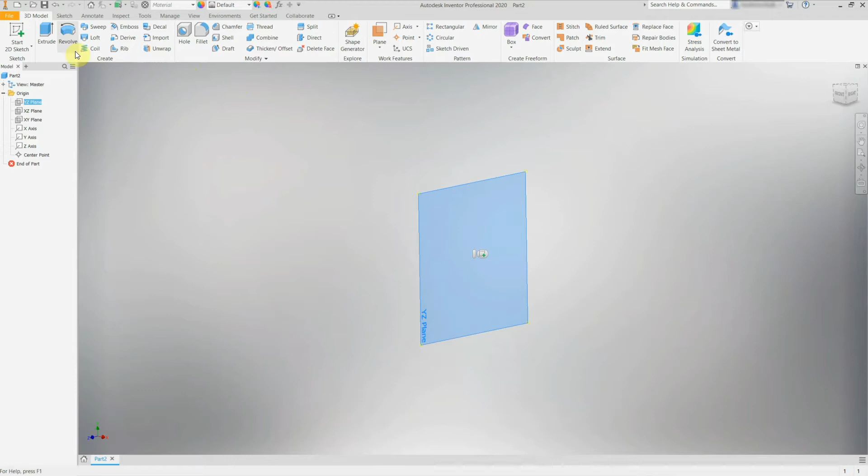We are going to model another component of the V block, specifically the shoe that goes across the V block to help grip the metal bars we put in place. It's a horseshoe shaped design, and we're going to start by drawing it from the end elevation standpoint. I'm going to create a new sketch.

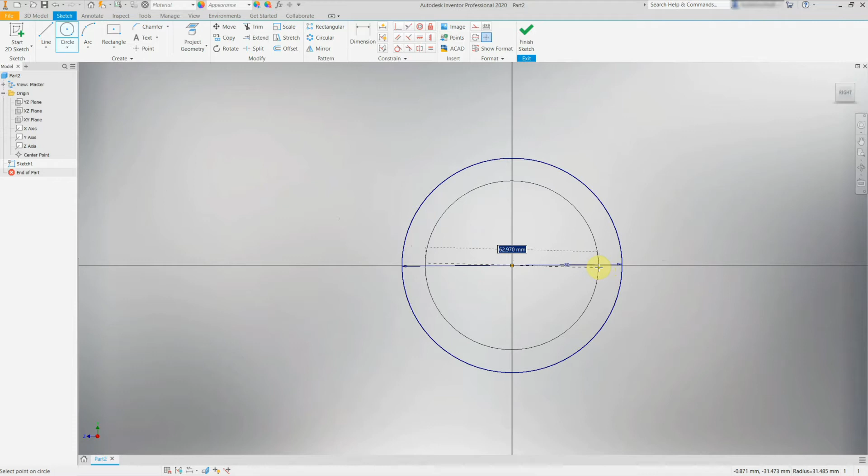The shape is horseshoe shaped in nature, so it requires two circles. I'm going to start with one circle, and the drawing says it's got an outside radius of 40 millimeters, meaning we need an 80 millimeter diameter circle. The inside radius is 30 millimeters, meaning a 60 millimeter diameter circle.

I'm going to take a straight line tool, turn it for construction, and draw this through the center, then use the trim tool to trim away half the circle, so we're left with a semicircle arch shape.

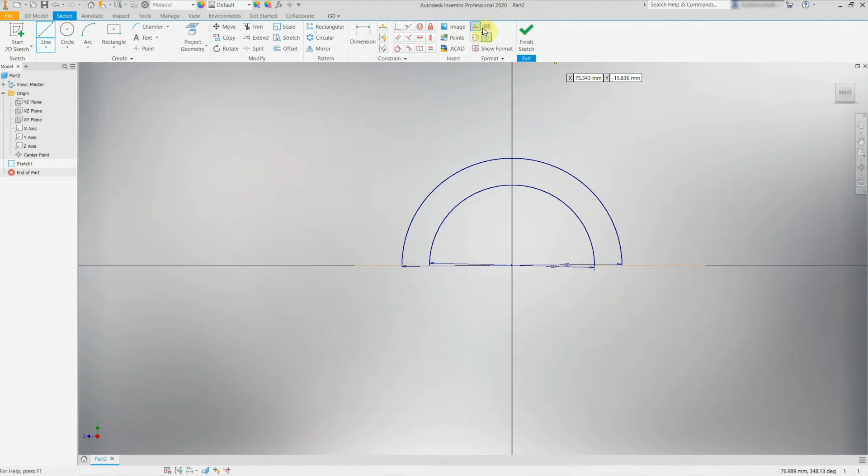I'm now going to draw one leg of the horseshoe shape of this shoe that attaches to the V block. I'll take the straight line tool, turn off construction mode, and start from the outside. I'll draw straight down - the overall height of this component is 35 millimeters. It then comes in a further 15 millimeters going by the drawing, then up 15 millimeters, in 5 millimeters, and then back to the beginning.

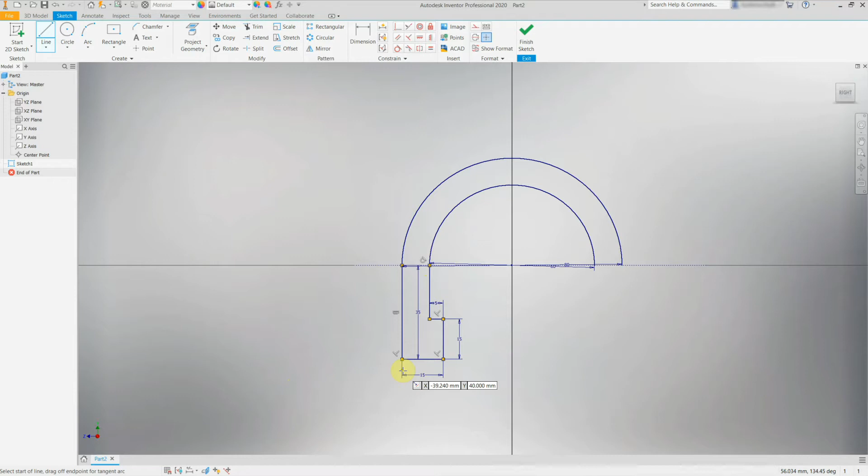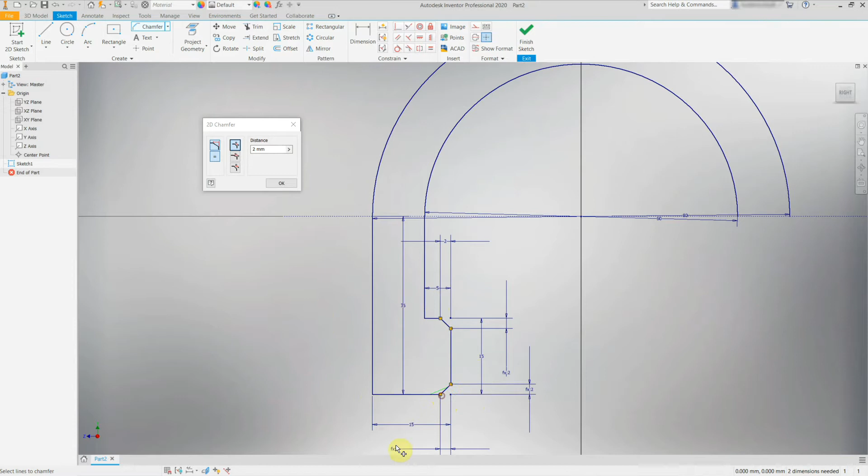This feature has 3 chamfers on it, one at each of these corners, because it's a metal product. I'm going to take the chamfer tool - the chamfers are all 2 millimeters by 45 degrees, and Inventor will default to 45 degrees so we just set the distance. I'm going to click on this corner, and this corner here. Good, I'm happy with that.

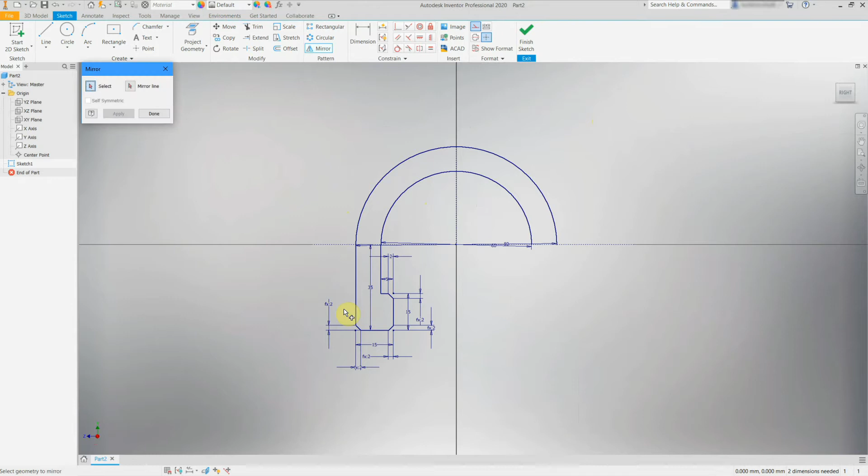I'm now going to mirror that on a line of symmetry across to the other side. I'll take the straight line tool and put this up through the middle. Then I'll take the mirror command and, holding down shift, select the lines or edges I'm wanting to mirror. Then choose the mirror line, select that center point, and say apply, and we've got it onto the other side.

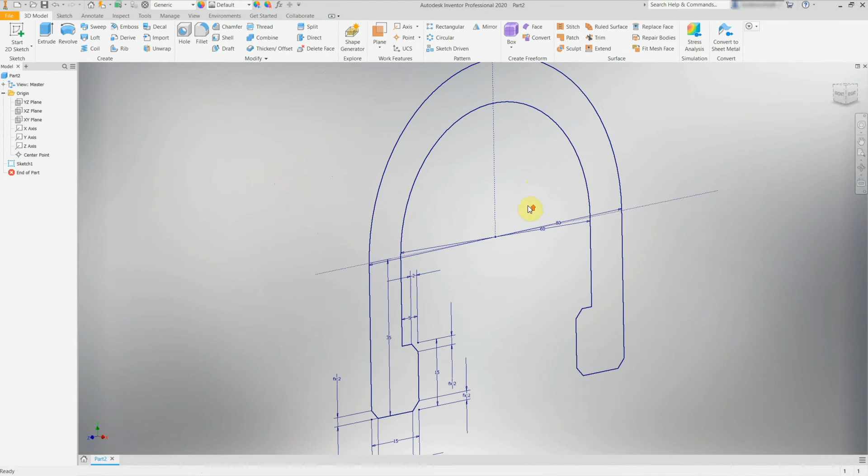Excellent. So I'm finished with that sketch now, and I want to extrude this - the size according to the drawing is 20 millimeters. Now again, I could extrude it just 20 millimeters out on this plane in this direction, or I can make it go the other direction.

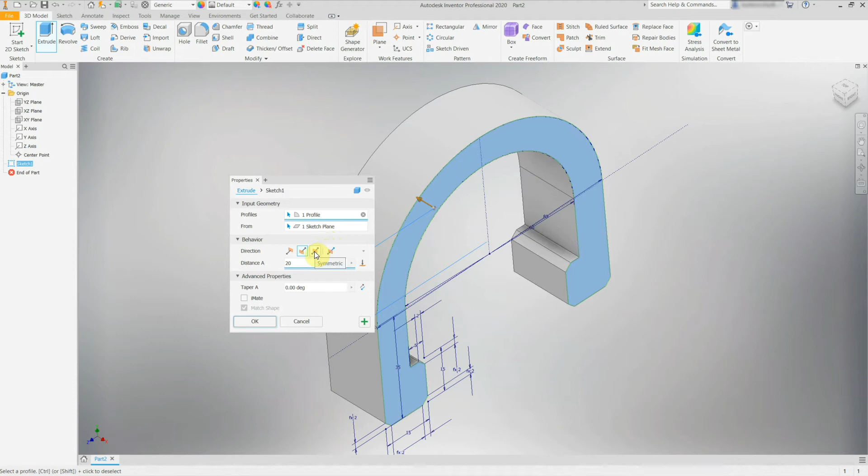But I do know, according to the drawing, that I'm needing to put a boss with a hole through it, which is threaded through the center. So the best thing to do is use the work plane I've been previously using. To get it in the center, if I just use the symmetric option, that's in the middle there, and I can say OK.

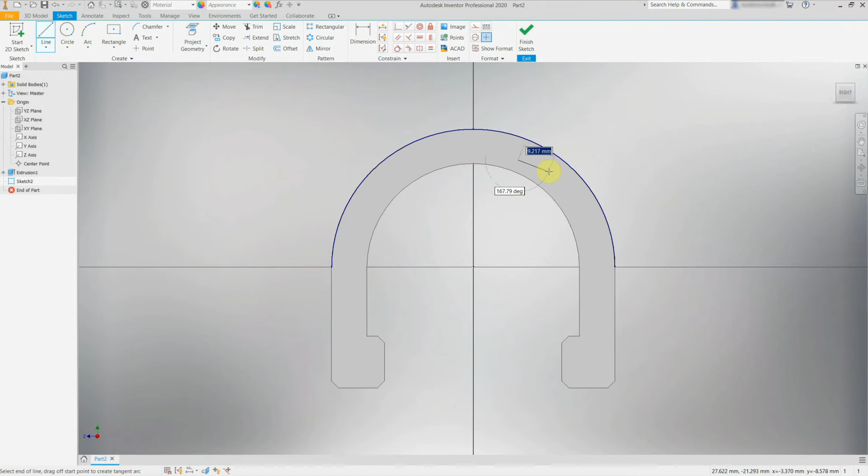I'm now going to go back to that plane and create a new sketch. This sketch is half inside the current 3D model, so if I drew a line just here, I can't see it - it's inside the 3D model. If I hit F7 on my keyboard, it gives you a sectional view, cutting the 3D model in half so I can see inside what I'm drawing, which is exactly what I need to do. But I don't need that line.

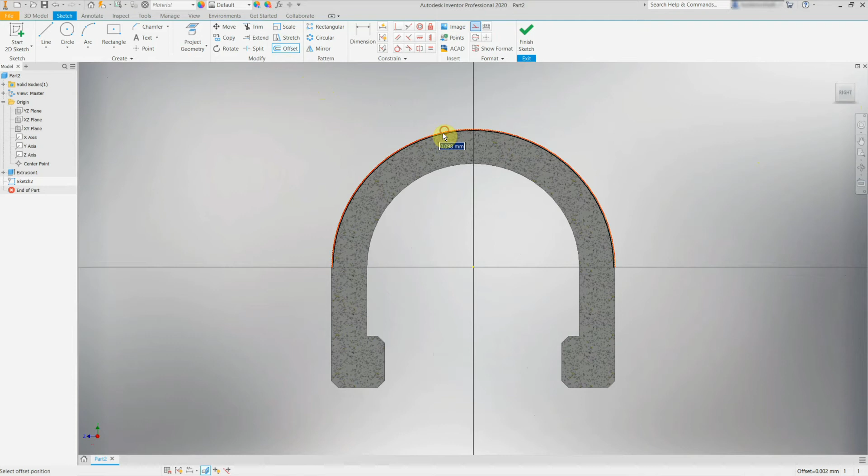What I do need is to find the midpoint between these two arcs, these semicircles. To do that, I'm going to take project geometry for construction and grab one of these edges, and the computer will draw it as a line - it's just drawn that as a faint dashed yellow line there. I'm going to take the offset tool and offset this in 5 millimeters, so we've now found the midpoint between the two semicircles.

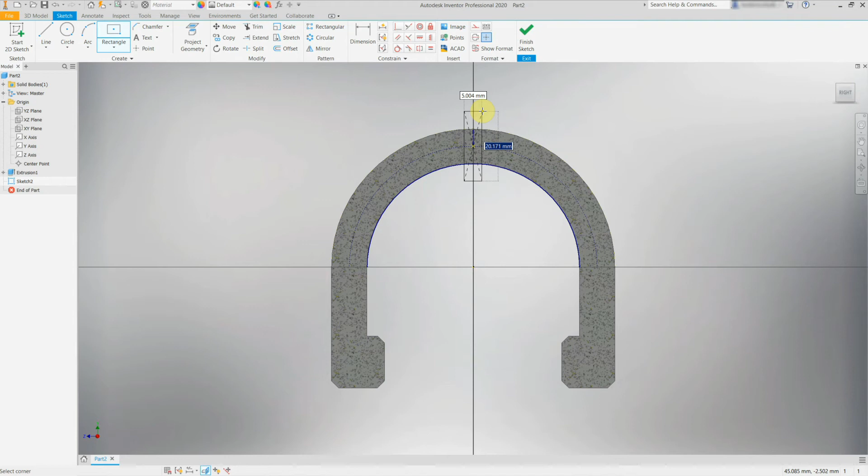I'm going to take a 2-point center rectangle now, but not for construction, and bring this up. According to the drawing, the height of this component is 14 millimeters tall, and the outside diameter is 10 millimeters, so I can just draw it like that. But because I'm going to use the revolve tool, I only want half of this, so I'm going to take the straight line and put that down the middle.

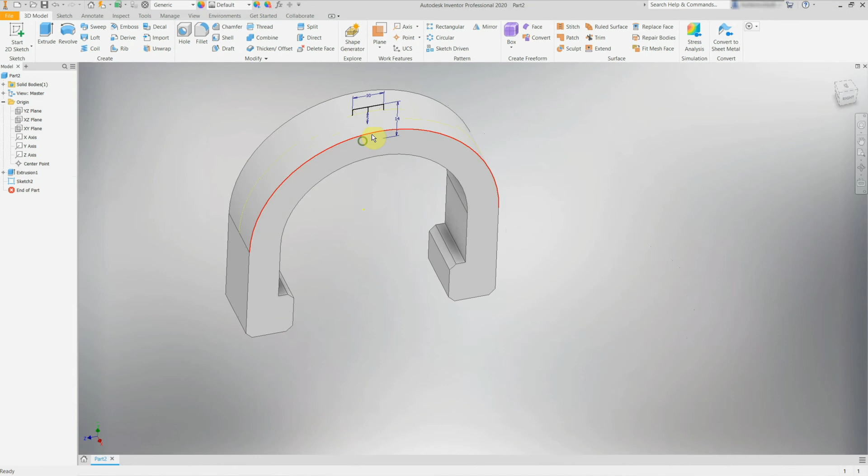I'm going to finish that sketch, take the revolve tool, and put my mouse very carefully over the profile - you could accidentally select both of these by mistake, but I'm just going to put it over one side. Select the axis as that middle line I just drew, and it will draw me in my boss component. Say OK. Okay, only two more little things to do - we've got to put a hole through this and then put a cosmetic thread.

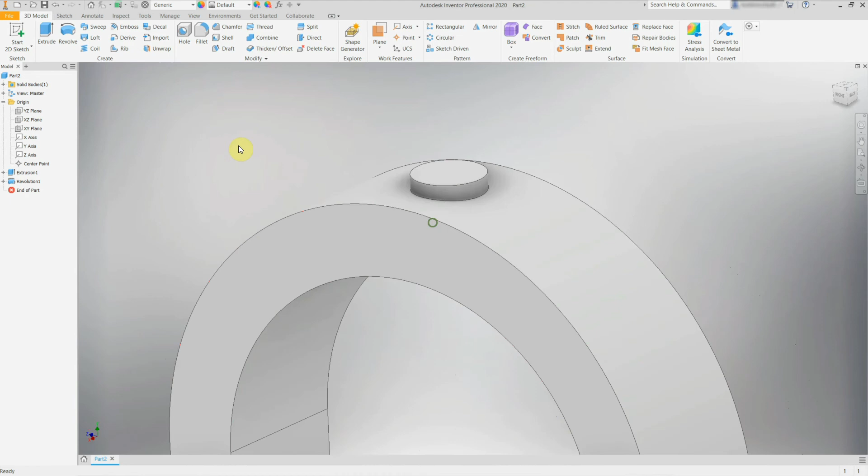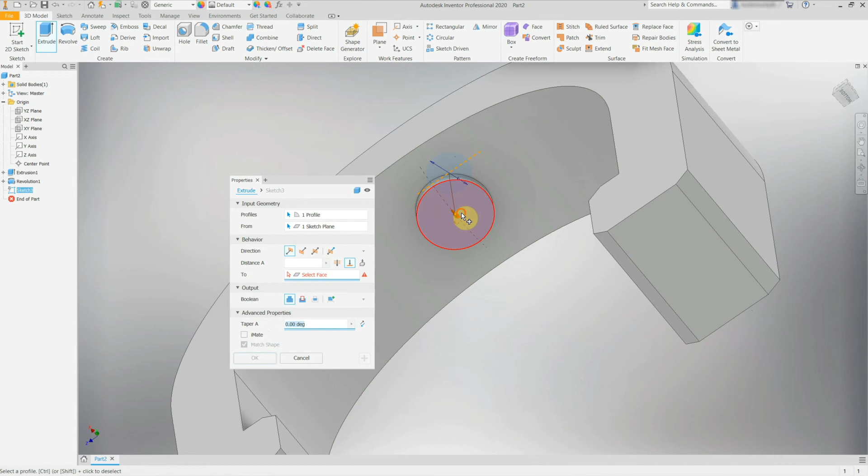I'm going to create a new sketch on this surface. The inside diameter of this is 6 millimeters, going by the size on the plan view of the drawing. Finish that and extrude that, and I'm going to say through to that face - I've selected the through command to that face, making sure I'm subtracting the material, and say OK.

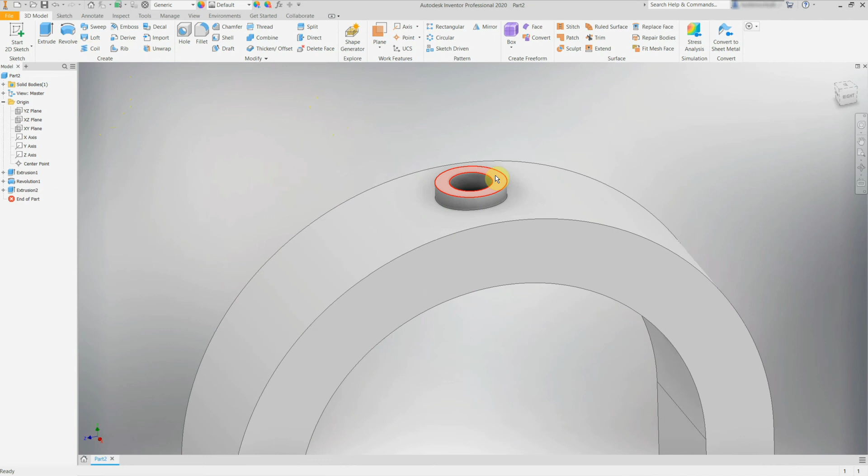Okay, one final thing to do is add what we call a cosmetic thread. You could add a real thread effect using the helix or coil command and 3D model a real thread in this, but the issue is it's going to create lots of extra vertices and faces, which will slow down your computer dramatically, and there's no real advantage to it.

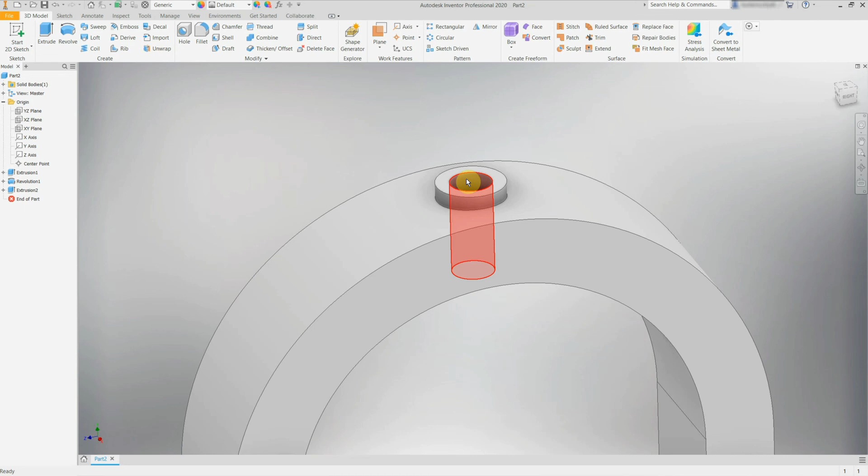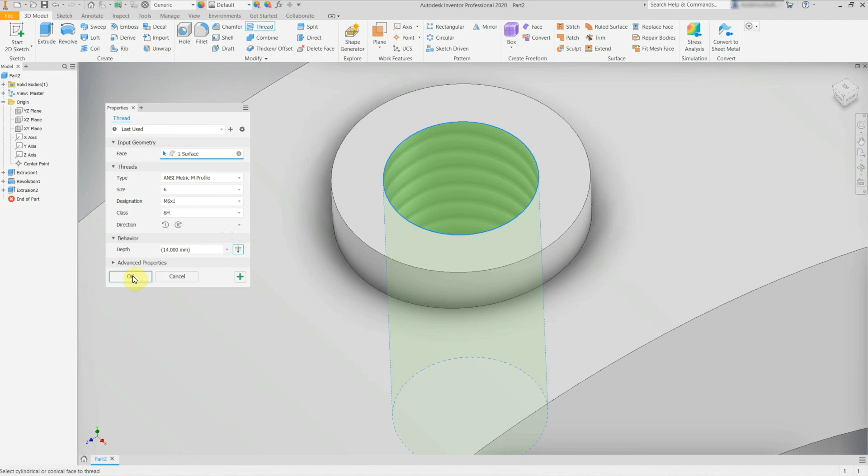What we want is to say this is a thread, so later on when it comes to the technical drawings, we can identify that this is a threaded component. If I select the word thread and point to this hole, it will wrap round an image which symbolizes a thread. You get lots of different options for threads - not the point of this video, but there's lots of technical issues to do with different types of threads, sizes, pitches, directions. We don't need to know that. We're just going to say OK, and we're given a cosmetic thread which will appear in our technical drawings, and that component is ready.